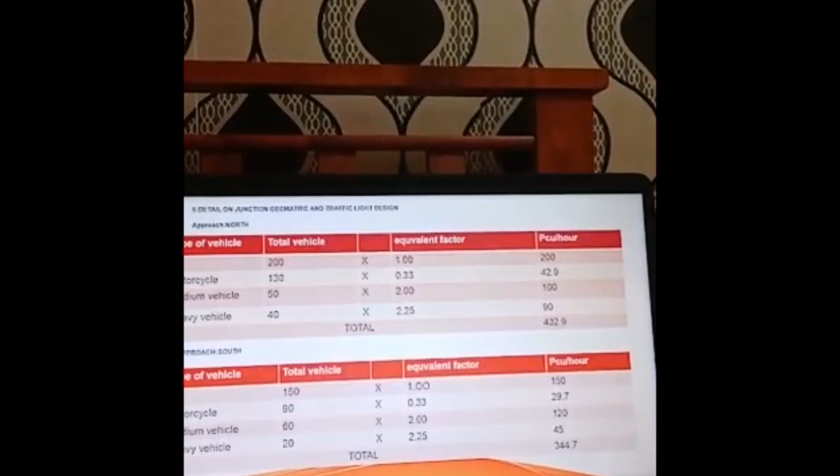I will explain the details on junction geometric and traffic light design. As we can see, for the approach at north, the PCU from north is 432.9. Next, from south is 344.7.

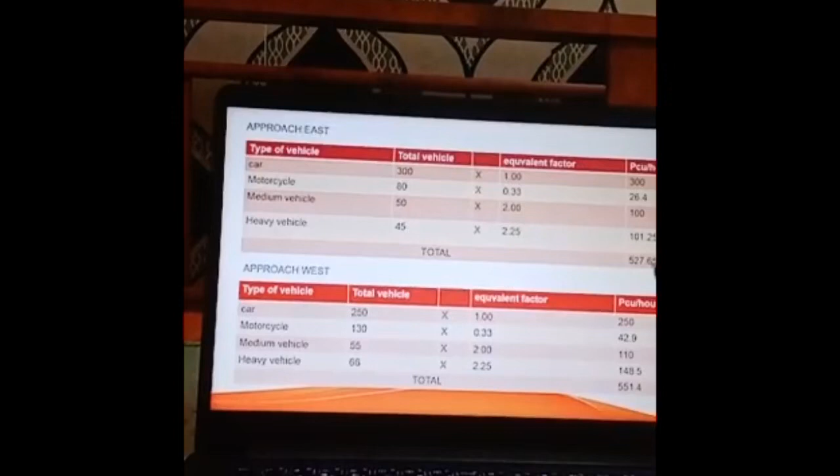From east, 527.65. From west, 551.4. And the last one, this is our calculation. That's all from me, thank you.

Hi, I'm Tyson. Today I will present the traffic light design and the conclusion.

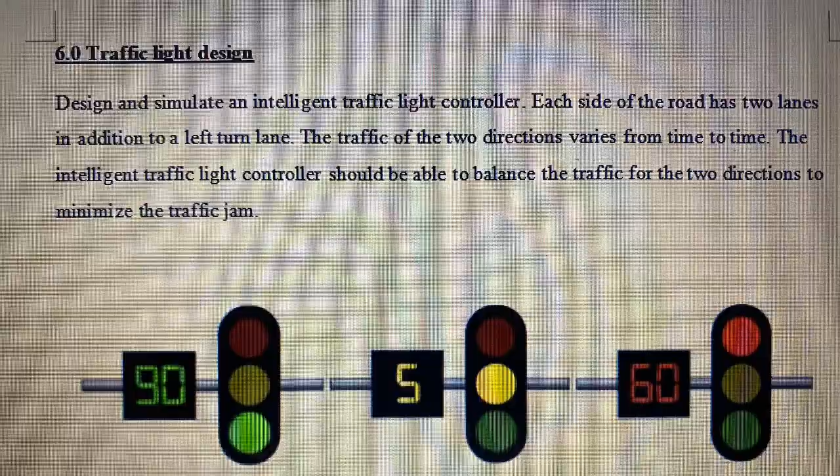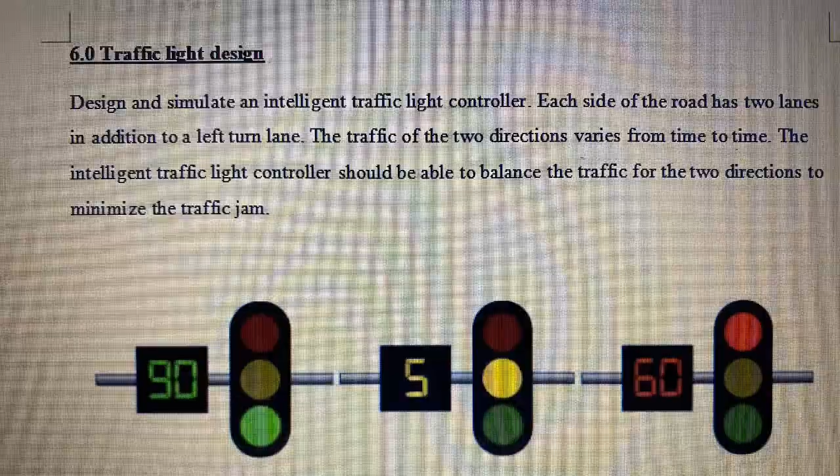Traffic light design: design and simulate an intelligent traffic light controller. Each side of the road has two lanes in addition to a left turn lane. Traffic in the two directions varies from time to time, so the intelligent traffic light controller should be able to balance the traffic for both directions to minimize traffic jams.

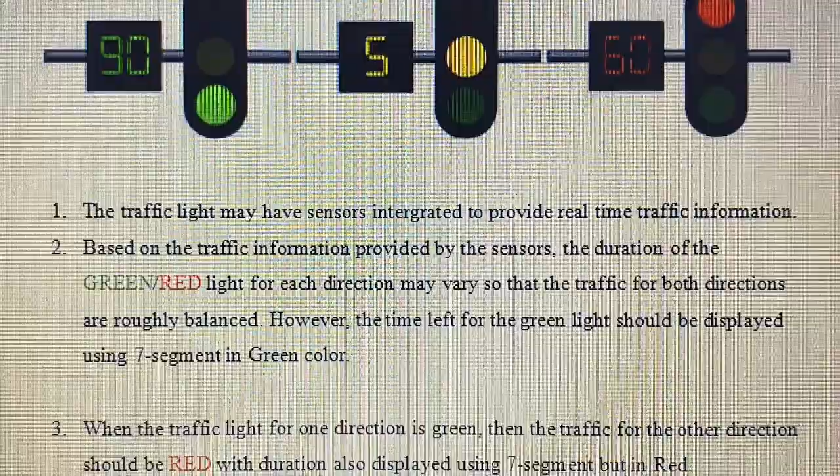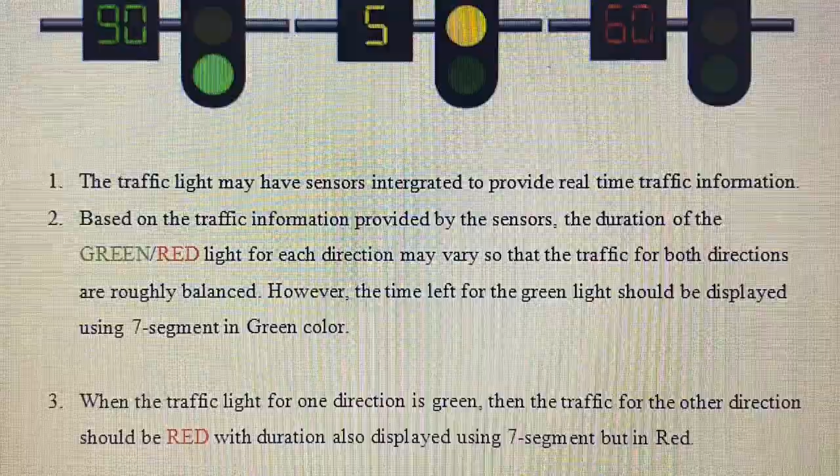As shown in the figure, number 1: the traffic light may have sensors integrated to provide real-time traffic information. Number 2: based on the traffic information from the sensors, the duration of green and red light for each direction may vary so that the traffic for both directions is roughly balanced.

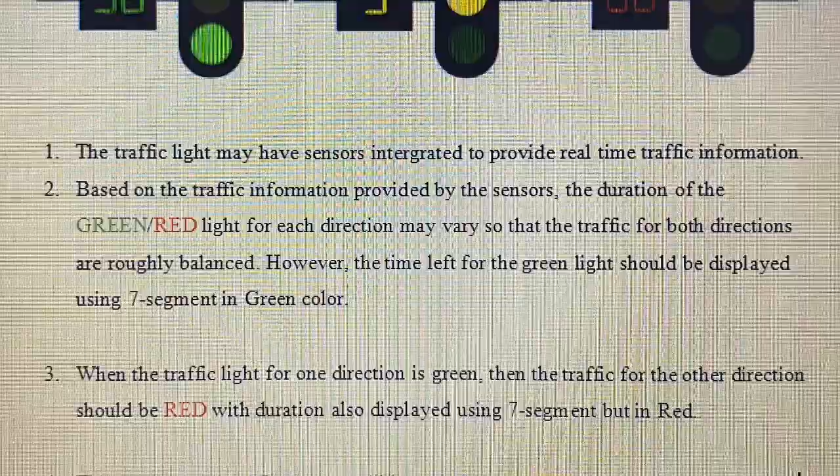The time left for the green light should be displayed using 7 segments in green color. Number 3: when the traffic light for one direction is green, the traffic light for the other direction should be red, with duration also displayed using 7 segments but in red.

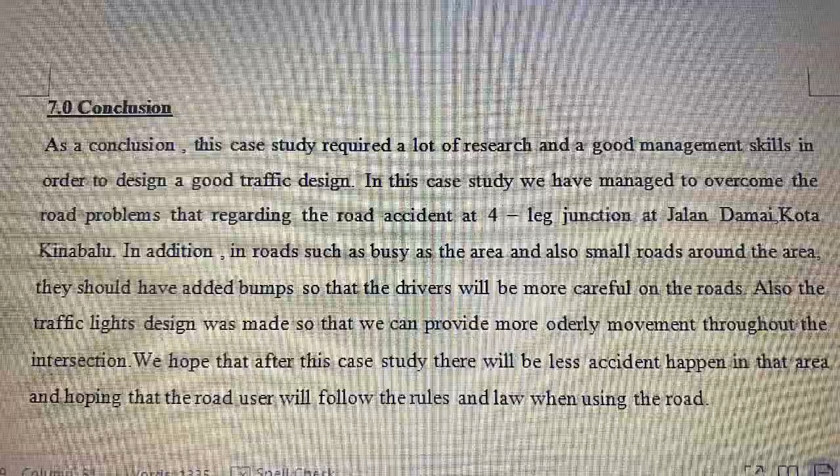Number 4: the green light and the 7 segment display will switch to yellow when the timer value becomes 5 or less, before switching to red. As a conclusion, this case study required a lot of research and good management skills in order to design a good traffic design.

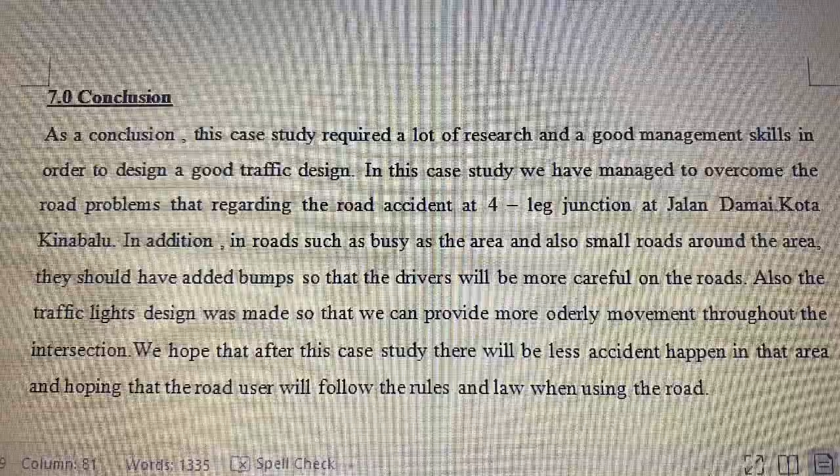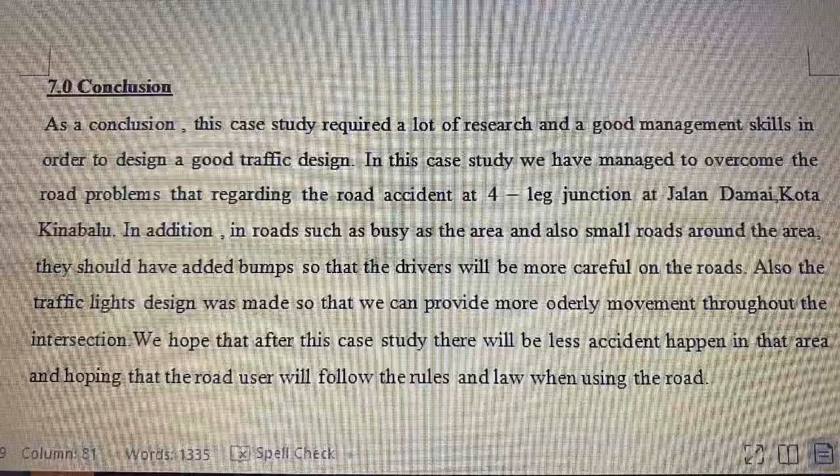In this case study, we managed to address road problems regarding road accidents at the 4-leg junction at Jalan Damai, Kota Kinabalu. In addition, busy roads and small roads around the area should have added bumps so that drivers will be more careful on the roads.

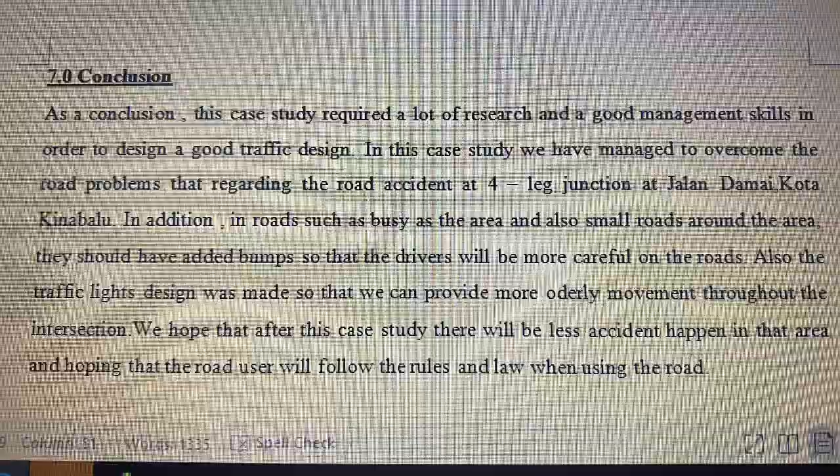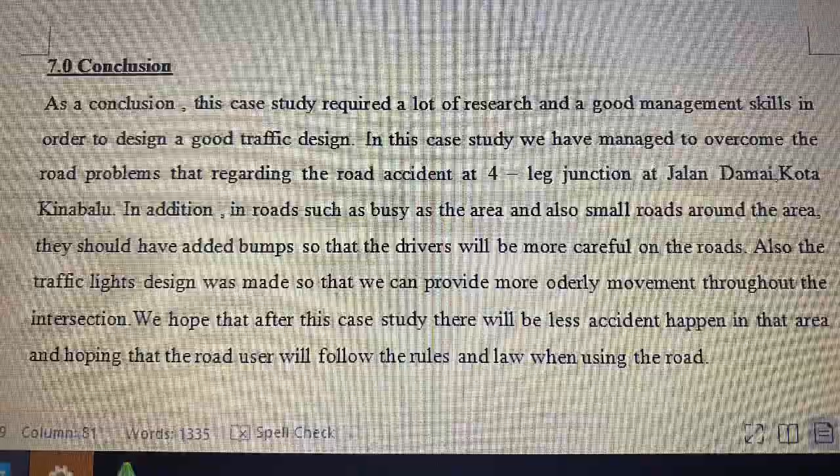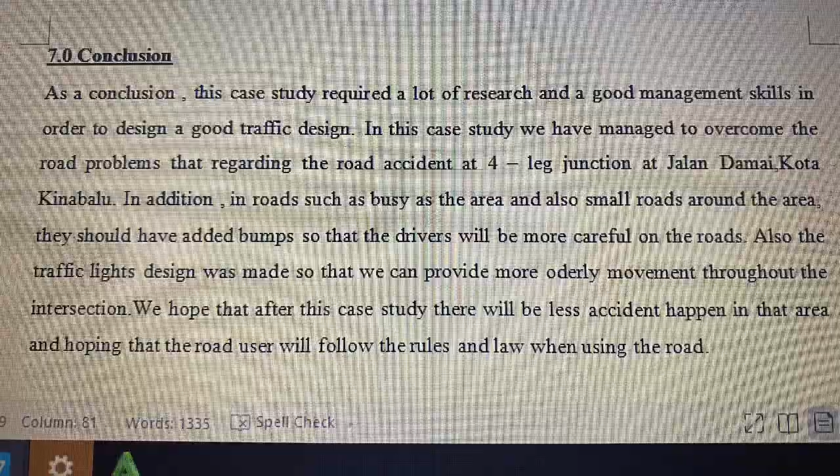The traffic light design was made so that we can provide more orderly movement throughout the intersection. We hope that after this case study there will be fewer accidents in that area, and that road users will follow the rules and laws when using the road.